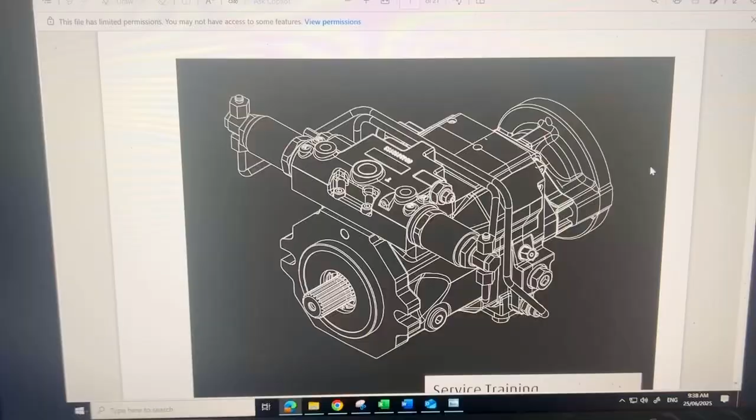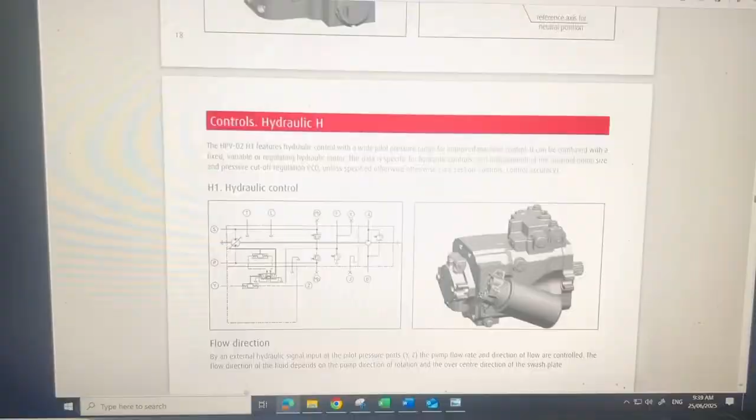So I have this pump here guys, this Linde HPV, but it's a 75 displacement, with this control type. Never seen this before. Normally the Linde control I experience is this type, like this H1P with PCO, pressure cut off, and some are solenoid control, but this one here is a bit different. So this is H2TF, that's the control.

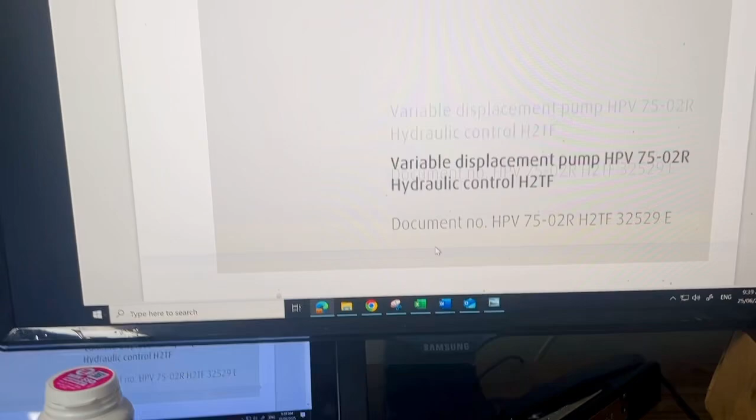So I printed out a big one and tried to figure out how this control works. And if you look at the circuit guys, I'll show you the circuit here, very interesting.

So this is the pilot valve, which is number 5, that's where the spool and sleeve are. This pilot valve commands the displacement stroke piston.

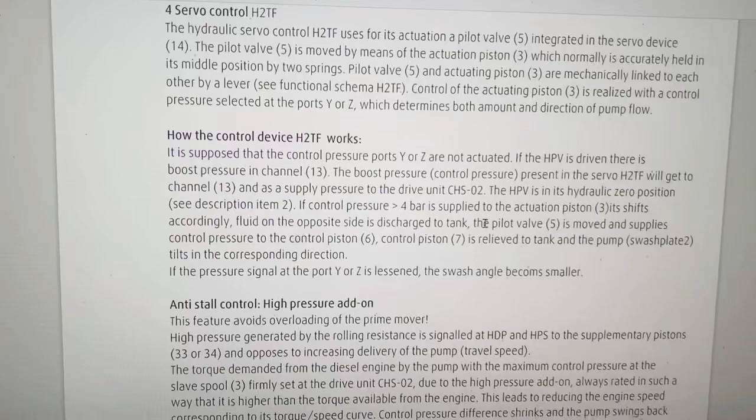So this displacement stroke piston, number 1, this assembly here, bear with me guys. This is the big one here, number 6. All right, these two are the displacement stroke pistons.

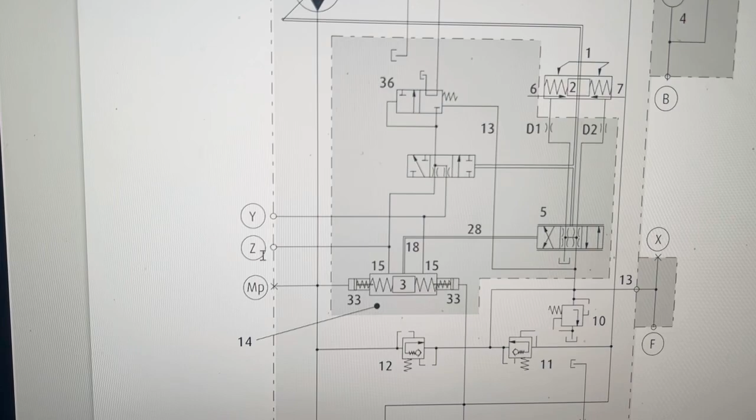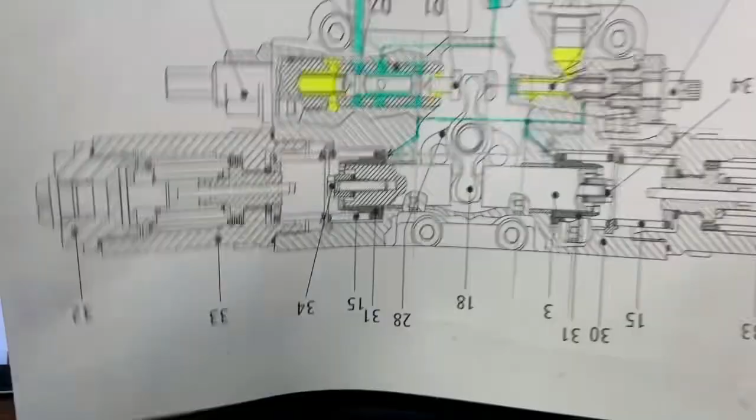And also this one here, I'm confused because I can't find this valve in this cross sectional. All right, so I can't find that one there.

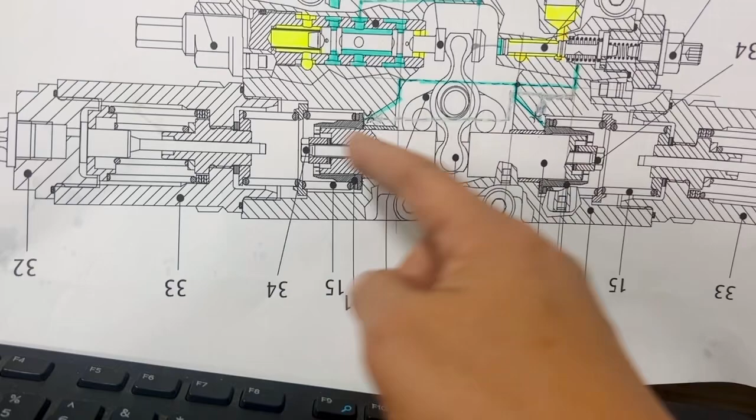So this is the pilot valve, this is the pilot valve here. This one here is the slave piston, so this is where the Y and Z act. So one is Y and the other end is Z. So this is the spool or the piston that moves and then affects the pilot valve because of the link. See this link here, that's the feedback lever, number 36, this one, 36.

All right, so when Y is commanded, this will shift and then control the other, if Y, the Z will be tank, obviously, because this is from your command, pilot command, so either pressure reducing or solenoid control.

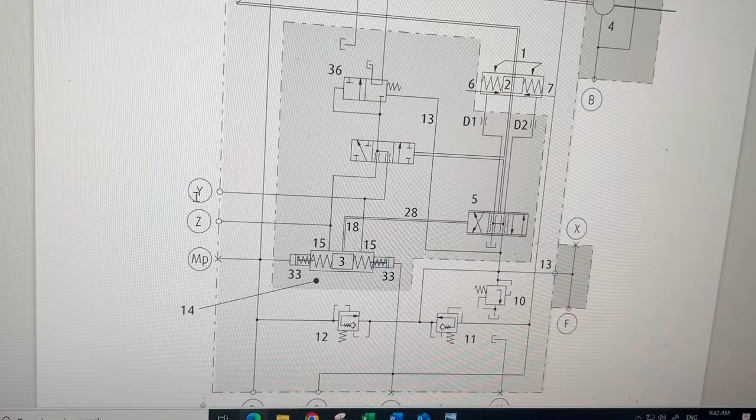Okay, now this one here, 33, these are the torque control. So it's a ratio, pressure from your system against pilot pressure, so it's a torque balance, so that the engine will not stall. Obviously that is set by the spring and shims.

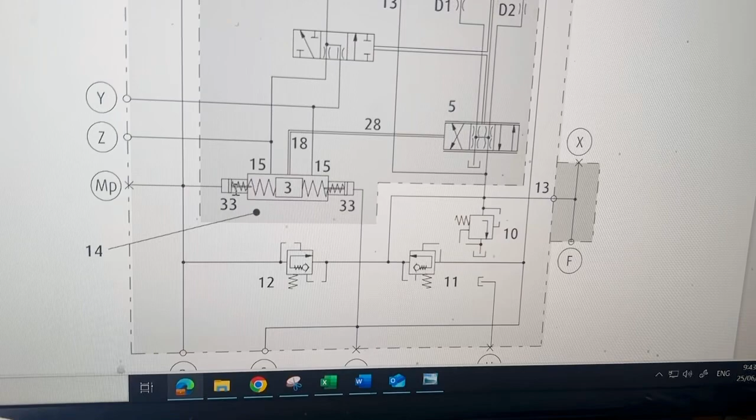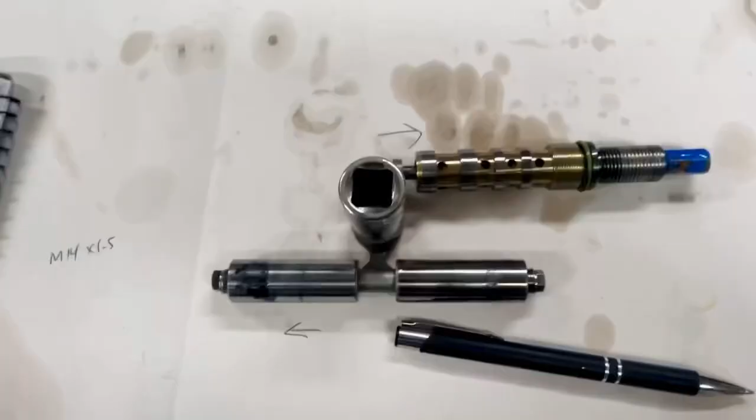Okay, now this feedback here, this part here is the feedback control. So how the feedback control works, I'll show you. So here guys, this is the piston, the slave piston, or the actuating piston, spool.

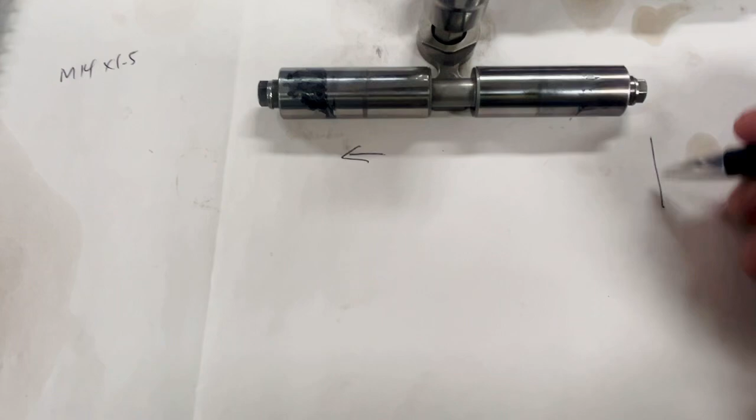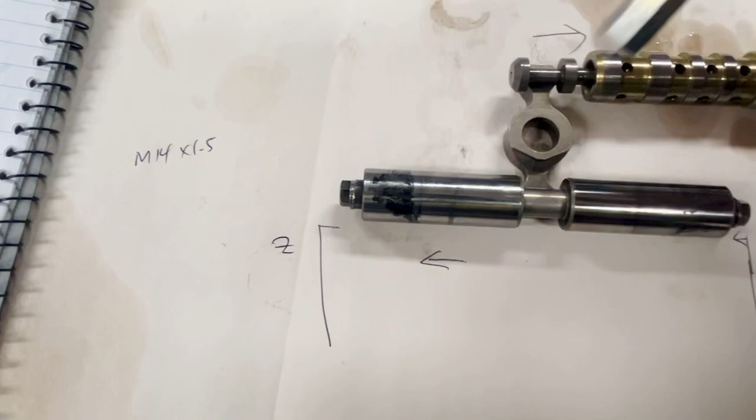This one here, this is where the Y acts, so Y and Z, okay, that's your pilot command. This one I just put the hex Allen key there, this is the lever, the feedback lever. This spool inside, this is the pilot valve assembly. This is where you adjust your neutral.

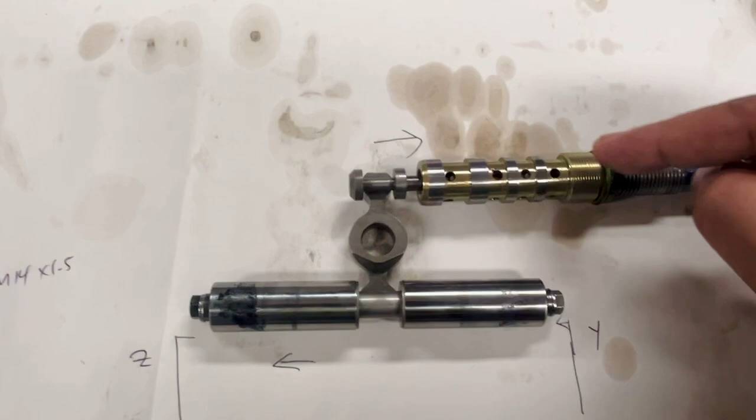So make sure your A and B are the same at neutral. If not, then you adjust the thread. As you notice, when I remove this one here, okay, so this one here is your... okay, so this one will be like that.

So this port here is your boost pressure. This one goes to the displacement stroke piston, D1 and D2. And then this one, that is drain, this port, so this is drain. This is, let's say, A and B and then P, and then this is drain as well here.

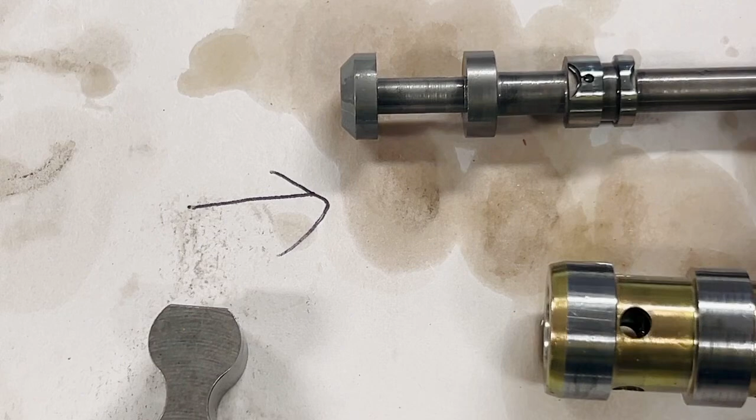As you notice, the spool has notches, meaning it's variable. See those notches there, and the other side as well. So meaning at neutral, your A and B drain to tank, but throttling. Okay, so the way it works guys, I just put this one without the spring.

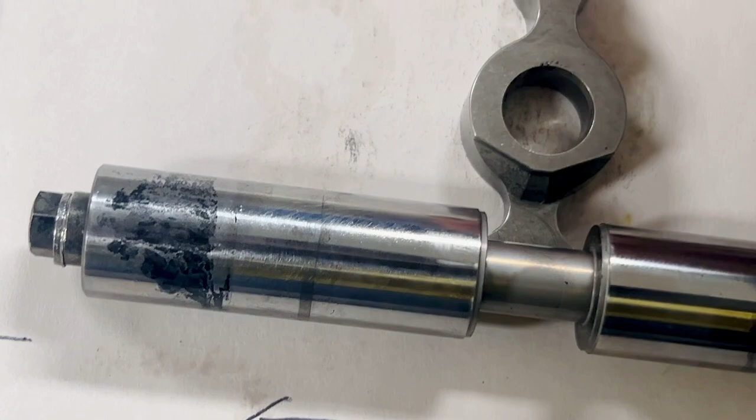Without the spring, so make sure it's in neutral. Okay, so we make sure that it's in neutral, A and B. Now the ports, now it's in neutral.

The way the feedback works, let's say there's a Y command. You notice the lever move on the right side, meaning the spool moves on the left side. Once that moves, it's applied to either A or B, and then the swash plate of the pump will move as well, depending on how much the command, because it's proportional, guys.

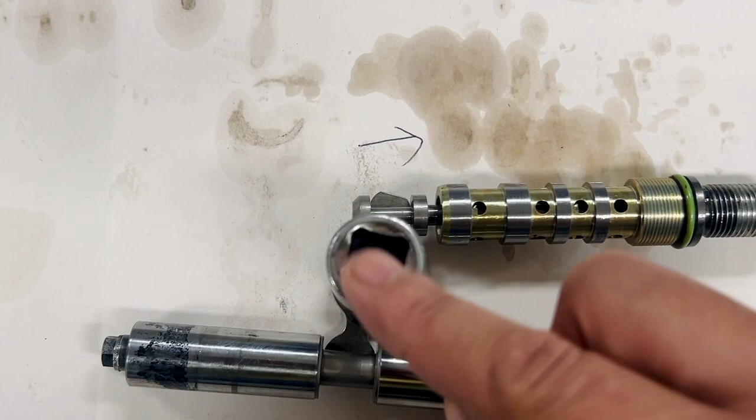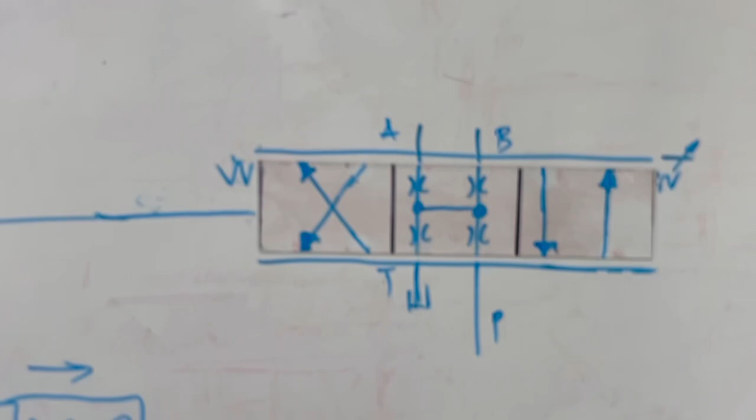Once the swash plate moves, because this one here is connected to the swash plate, this will go back to neutral, back to that position. So if we simplify the circuit, let's say the control Y, P to B, and Z, P to A.

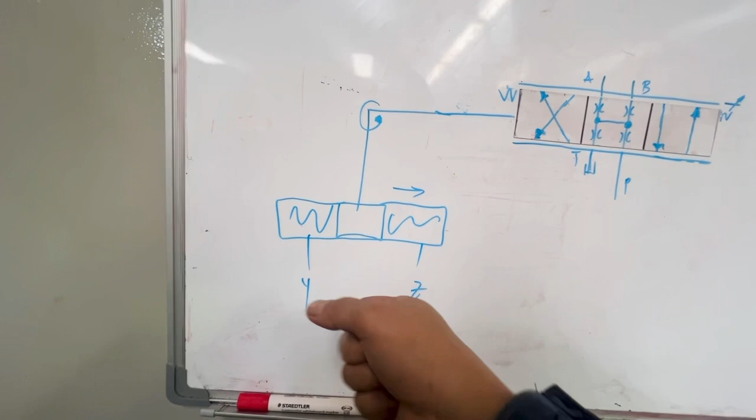All right, let's see. This one here, the control Y. There is a pilot pressure, there is a command, meaning there's a command from the operator to tilt the pump. So obviously this one, because it's a link, goes the opposite way - this side will go to the right, but this one goes to the left. So what happened is P to B.

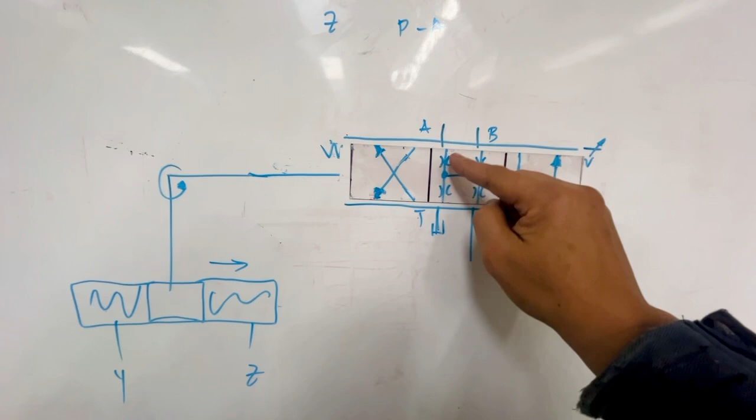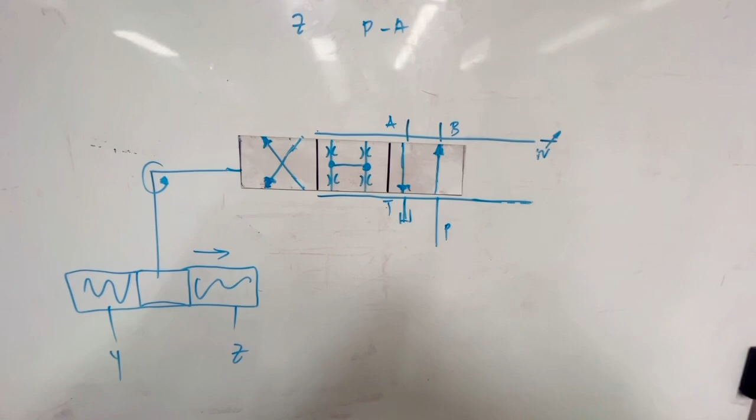By the way, in neutral you can see it's open to tank drain. So P to B, that one will move. So when B is open, obviously the swash plate will tilt, depending on how much command the operator needs - if it's quarter, half stroke, three quarter, or full stroke.

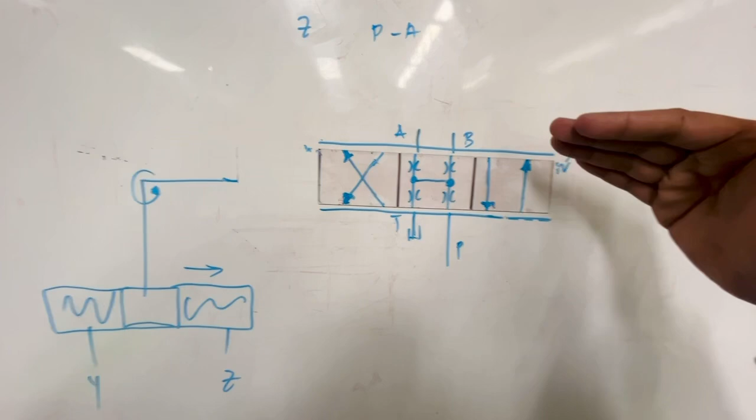So once that swash plate moves according to the command, because it's proportional, and because this one is linked to the lever, this will move back to neutral. That means if the command is half stroke, the swash plate only displaces half of the total displacement - otherwise the swash plate keeps going without the feedback control.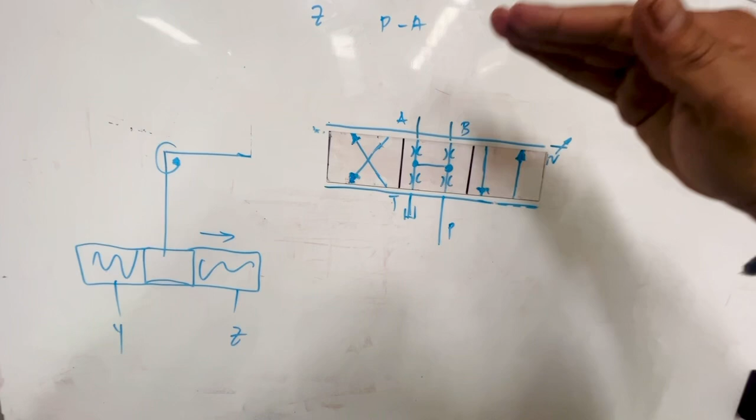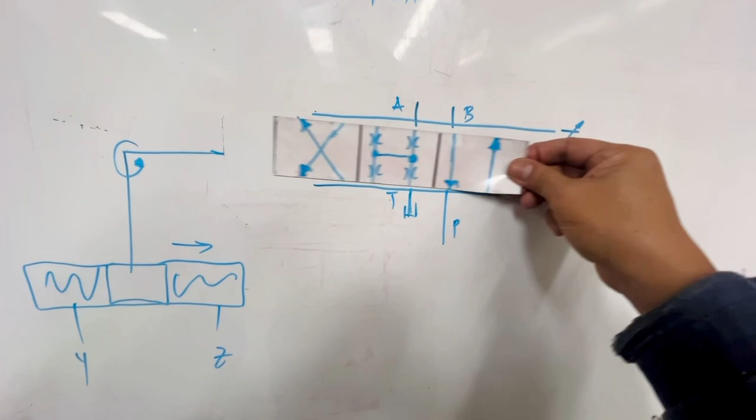Once that goes to neutral, the swash plate maintains that position. When there is leakage, it will compensate like that. So this spool, guys, is always moving - this is exaggerated, but that's how the spool moves inside the sleeve to balance the spring.

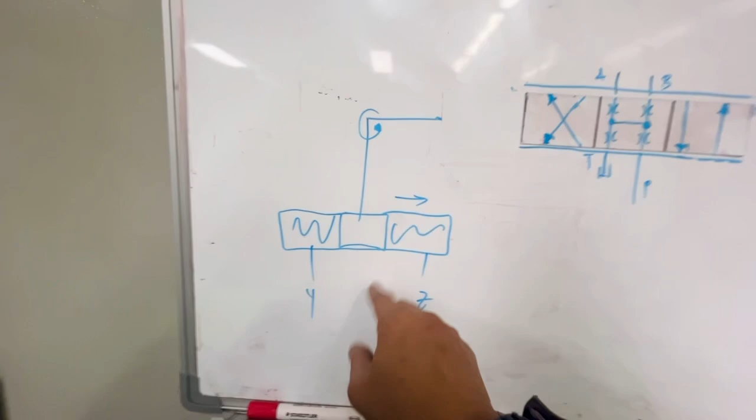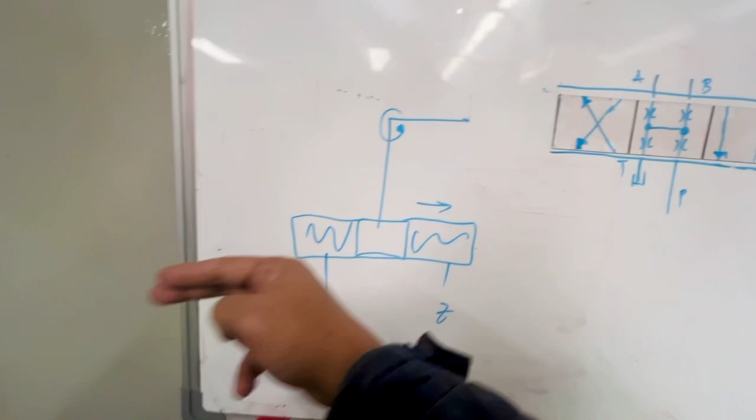Okay, now remember that's in balance. So when you remove the signal from Y, obviously the spring pushes the piston, or this spool here, pushes that way. So what happens is if it pushes to the left, this one goes to the right. So because of the lever, this will go to the right, so P to A.

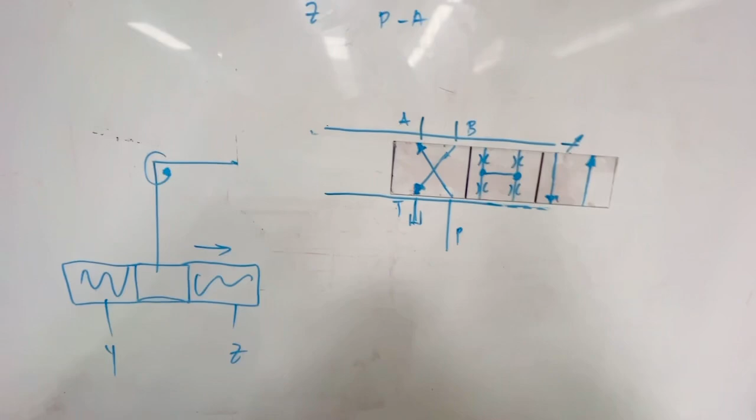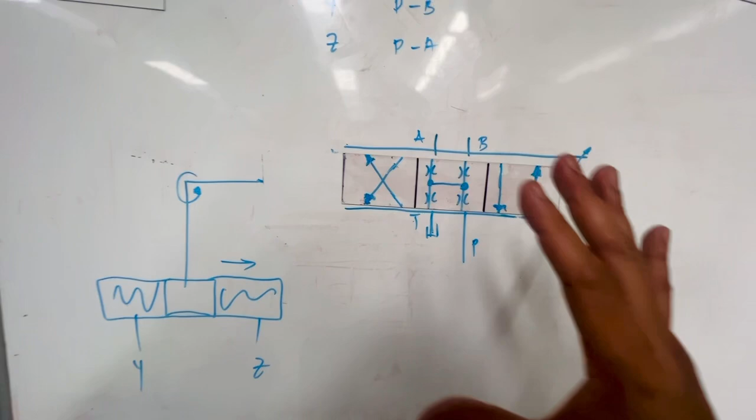So what happens now - your swash plate, this stroke will go back to the neutral position. Once the swash plate moves, because there's a link connected to the pilot valve, once that swash plate moves the other way to neutral, this will go back to the neutral position, and then everything, the spring, is balanced. So that's how the feedback works.

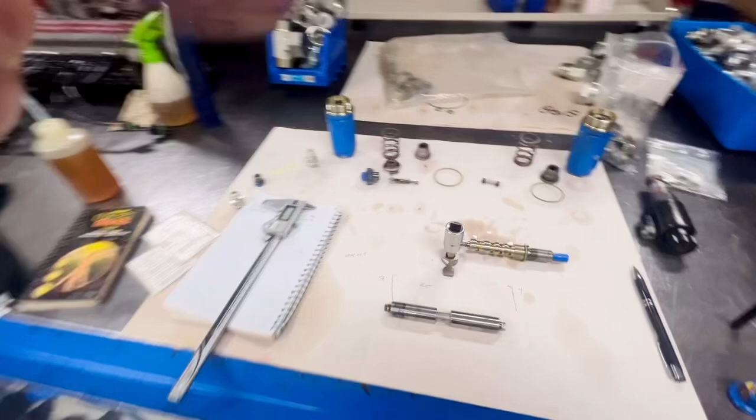And yeah, so I just found out that this control here is proportional pilot control on your flow - it is a positive flow control. Then this one here is your torque control, or torque balance.

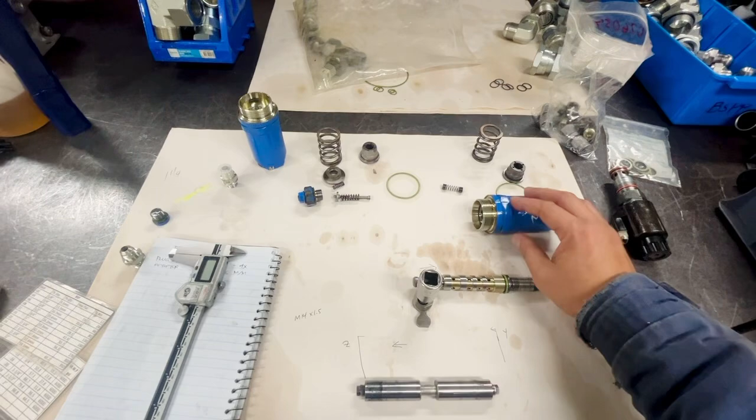Okay, and then what I'm going to do, because I'm going to use this as my test rig, I will plug the torque control and then just depend on the relief valve so that it won't change my speed driving my hydraulic motor. So yep.